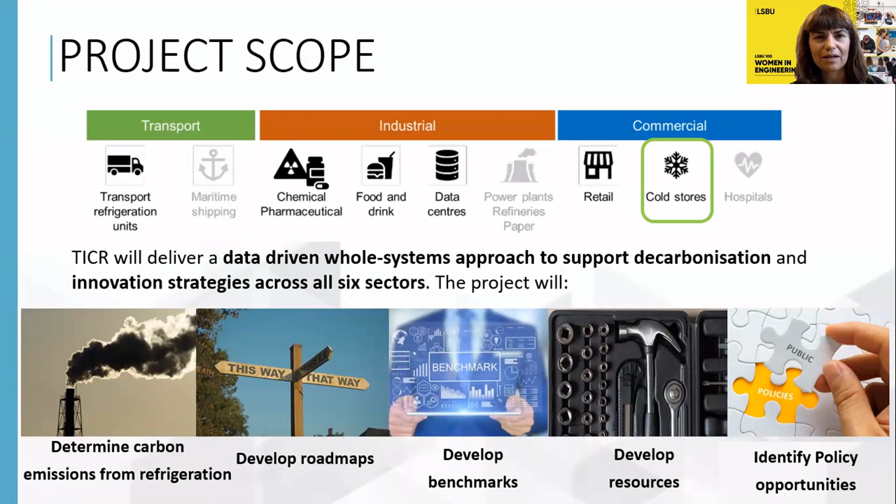And finally, this is a project funded by government, so we'll look at what policy interventions can really support the industry to get to net zero, and we'll be engaging with the industry throughout the project so that whatever we propose in terms of policy, it has the industry backing. So that's the goal, and we'll be engaging throughout the project. So we are about 1 year in, we still have 1 year to go, so there's going to be a lot of opportunities for you to input into the project. So if we move to the next slide. One more. Thank you. Excellent.

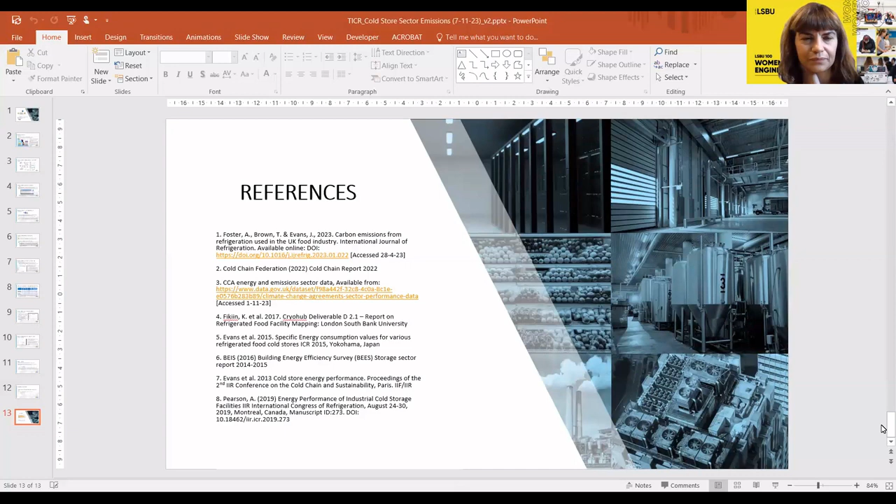Thank you. Thanks very much, Caterina. So we'll just swap over to Gareth Davis from London South Bank University, who's going to go through carbon emissions in the cold store sector. So Gareth, if you'd just like to put yourself in presentation mode and start at the beginning of the presentation, that would be great. Thank you. Yeah. Okay. Right. Can you see my screen? That's all perfect. Thank you very much.

Okay. Right. My name's Gareth Davis. I'm a senior research fellow at London South Bank University, and I've been looking at estimating the emissions profile for the cold store sector. So cold stores are mainly used for food and drink industries, but about 11% are used in other areas: pet food, funeral care, horticulture, pharmaceutical products. The Cold Chain Federation have suggested there are 1,131 cold stores in the UK, as shown on the map. They've also estimated that the chilled frozen food industry in the UK is worth around £19 billion with over 100,000 people employed. So it's a significant economic sector of the UK.

There are about 450 large cold stores operated by Cold Chain Federation members, but if there are 1,131 in the UK, that means there's about 680 operated outside of the Cold Chain Federation. The Cold Chain Federation cold stores represent about 40.8 million cubic meters of volume, and the cold stores are around 96,000 cubic meters each.

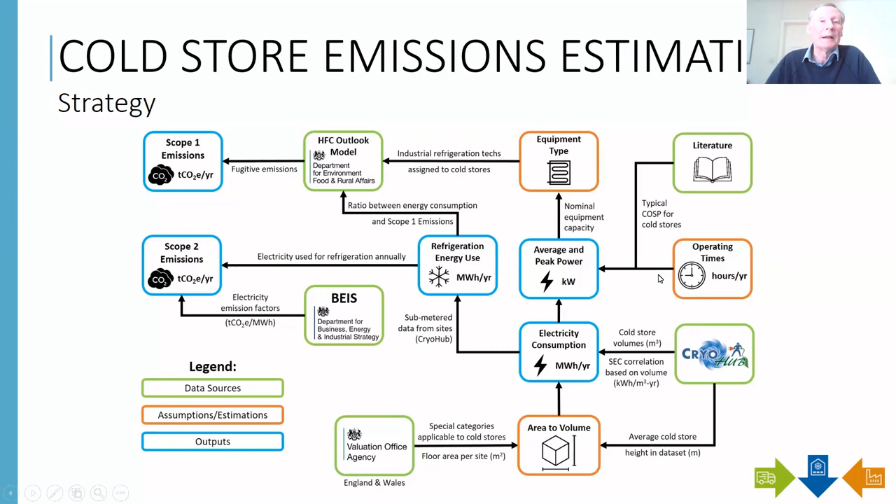And from the electricity consumption, we can derive the Scope 2 indirect emissions and the Scope 1 direct emissions, as shown here. The climate change agreement schemes are operated in many sectors of industry, including cold stores, and the cold store CCA scheme is managed by the Cold Chain Federation on behalf of the Environment Agency, and about 450 cold stores are covered by the agreement.

Now, the Environment Agency publish sector energy consumptions and emissions, and for the cold stores in 2020, they reported that the primary energy consumption was 3.63 terawatt hours per annum, which would equate to a final electrical energy consumption of 1.45 terawatt hours and Scope 2 emissions of 0.33 megatons. The total volume of the 450 facilities in the CCA is 40.8, as we saw earlier, and from that you can calculate the average specific energy consumption for the UK is currently 35.5 kilowatt hours per cubic meter per annum.

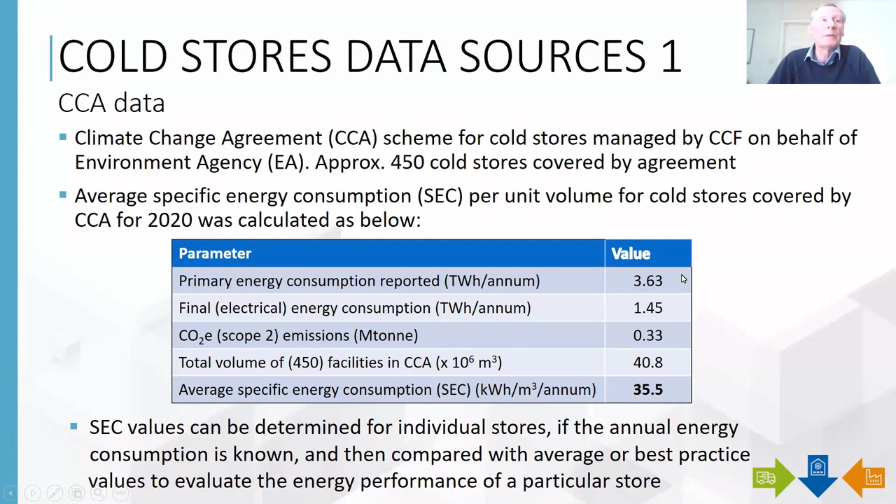SEC values can, of course, be calculated for individual stores, and you can then compare them with average or best practice values to evaluate your energy performance. The CryoHub project was EU funded and investigated cryogenic energy storage in refrigerated warehouses, and chilled and frozen volume data for 257 cold stores was collected. Then, using average SEC per unit volume values for chilled, frozen and mixed stores collected from survey data, the annual energy consumption for each store could be calculated.

The Valuation Office Agency data includes chilled and frozen store floor areas, but not height and volume data, although I think they may collect height and volume data, but it's not in the public domain at the moment. A total of 350 cold stores separate to the CryoHub cold stores were identified from the VOA dataset, and two approaches were used to estimate the annual energy consumption.

First, using SEC per unit area values, which were obtained from the BEES storage sector report. BEES stands for Building Energy Efficiency Survey. It was carried out by BEIS in 2016, and they could be used to calculate annual energy consumption. And then the other approach was to convert the areas to volumes using a mean height of 9.3 meters, which was obtained from the CryoHub data, and then using the SEC per unit volume values again, estimate the energy consumption.

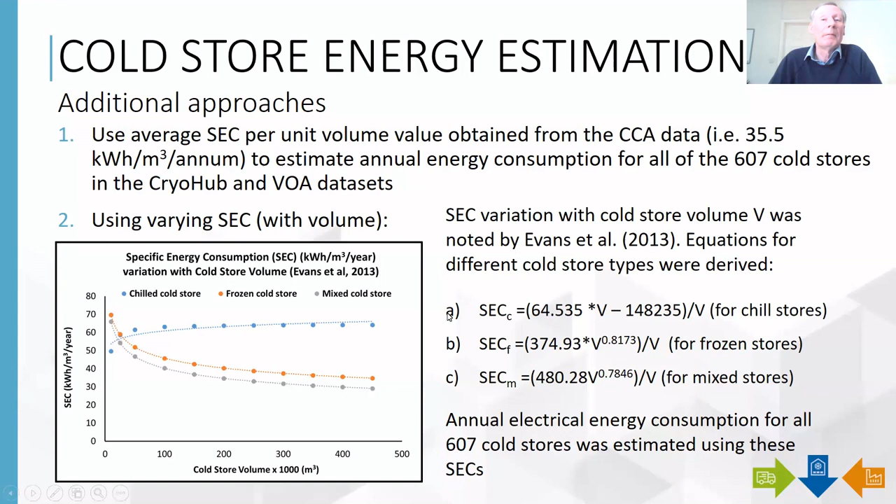So comparing the results for the different approaches, with the original average SEC from the 2015 paper, we have 50.2 for chilled and 66.2 for frozen and mixed cold stores, and that estimated the annual energy consumption as 3.43 terawatt hours. With the SEC per unit area values from the BEES report, we arrived at a slightly lower electricity consumption of 2.95 to 3.27 terawatt hours. Then using the CCA estimated average SEC of 35.5, the electricity consumption was 2, and the varying SEC with volume approach produced an electricity consumption of 2.25.

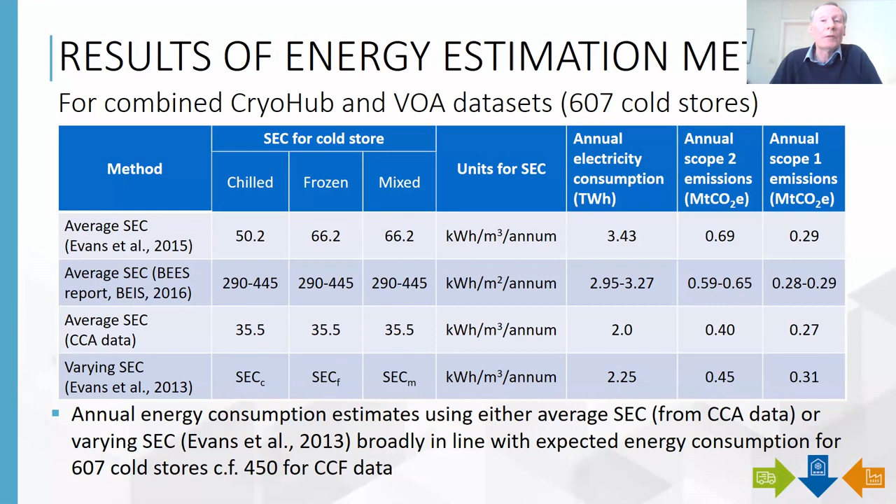With the electricity consumption, we could then estimate the scope 2 emissions, and then also the scope 1 emissions. And what we would note perhaps from this is that the values of 2 and 2.25 are broadly in line with what you would expect for 607 cold stores compared to the 450 from the Cold Chain Federation data, which we know the consumption for. So on a pro rata basis, that is about right.

Pearson in 2019 suggested a typical SEC for cold stores over the last 25 years was 30 kilowatt hours per cubic meter per annum, but with wide variation between stores. But more recent energy monitoring data suggested SECs in the UK are now more in the region of 8 to 20 kilowatt hours per cubic meter per annum, at least in the newest and largest stores. And a best practice curve was proposed as shown on the right here.

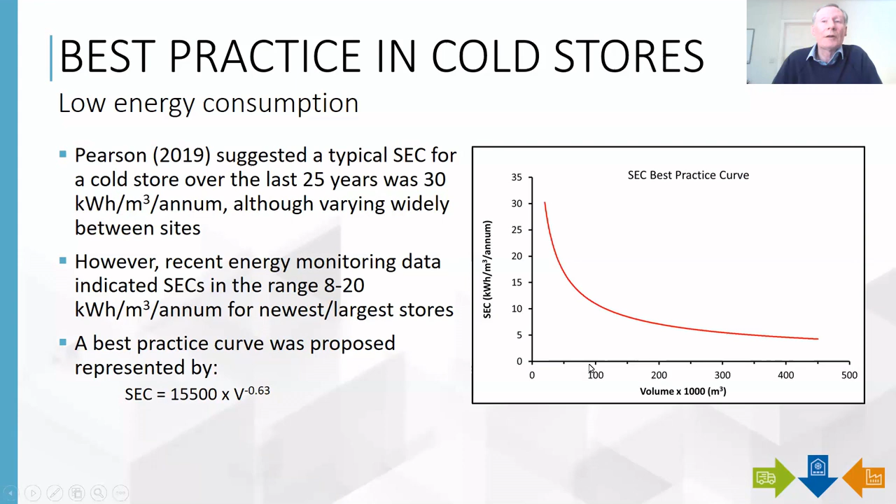What we aim to do in the project is to develop a benchmarking tool for cold stores, which would involve collecting data on annual energy consumption and volume for as many cold stores as possible in the UK. The data would be anonymized and treated confidentially, and with that data we could then define low energy use of best practice, and average and high energy user bands.

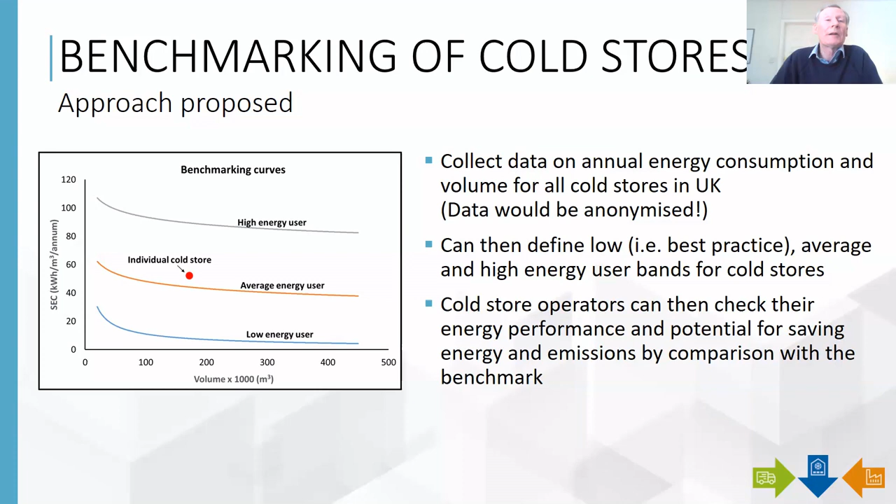So the data required for benchmarking is already being collected for CCA cold stores through the Cold Chain Federation scheme, but more data is needed, particularly for the cold stores which aren't in the CCA at the moment. And cold stores can already check their energy performance against best practice through the STAR refrigeration app.

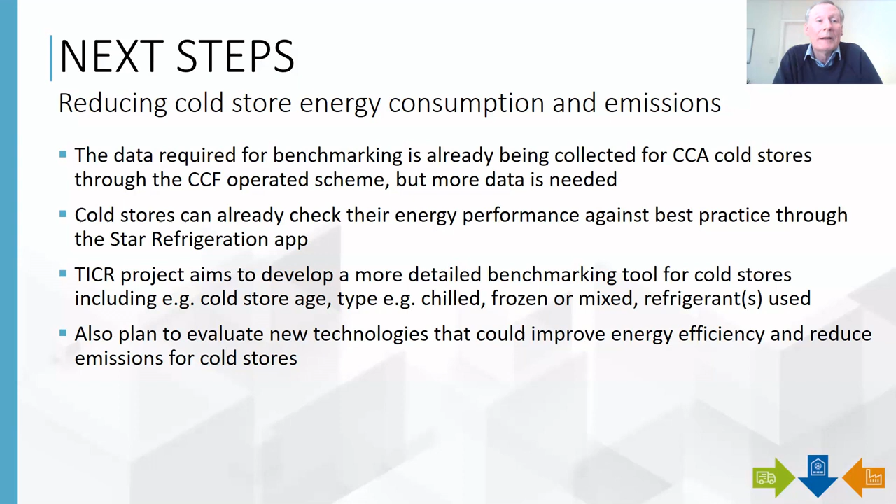But with this project, we aim to develop a more detailed benchmarking tool, including other factors such as the age of the cold store, whether it's chilled, frozen or mixed, what refrigerant is used, and refrigeration equipment. Also, we plan to evaluate new technologies that could help improve energy efficiency and reduce emissions.

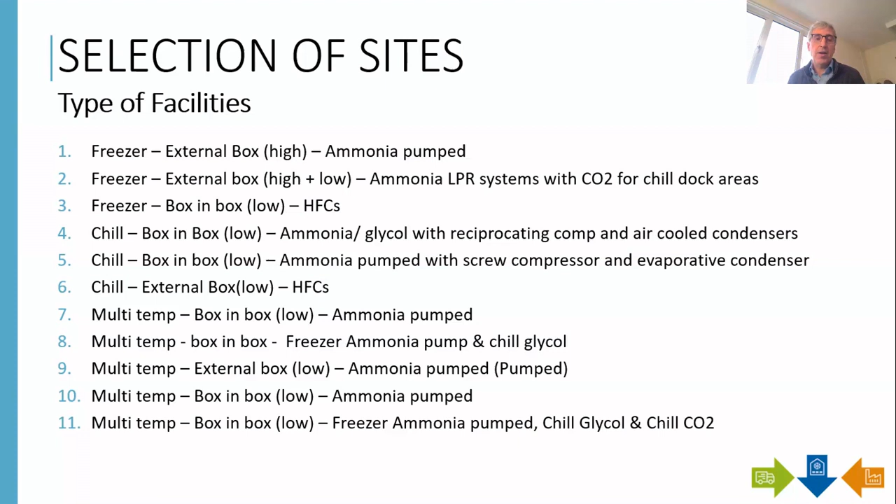Then there was a variety of different types of refrigeration systems, from direct pumped ammonia to an LPR system to HFCs. And for the chill store, there was glycol, and in some cases also CO2. So there is actually a variety of refrigerants around. So it wasn't just a few sites picked. I was really aiming for a big variety to get an understanding across the whole industry. Next slide, please.

So what about using technology? Well, what I'm actually finding is the refrigeration industry is very good at buying technology and the latest technologies. If they know what's out there, they're willing to buy it. So compressor inverters, condenser fan inverters, or gas cooler inverters, pumps, and buying the latest efficient compressors. The industry is very good at buying them.

But one of the challenges is when you come to buy evaporators and air cooler inverters, they've been buying them, but the industry is just running them as a fixed speed fan. So if you buy a bit of technology and you treat it like an AC fan, you're not actually going to get the benefit, because the reality is all you should have bought is the right AC fan. So if you're going to buy something like an EC fan, you need to actually use a speed control, because you're dealing with the cube law on fan speed.

And principally, the majority of places where EC fans are installed in evaporators and air coolers, they're not being used. And I hear there's challenges with those because they don't work. Well, you must control things with systems, not as individual coolers. You must control them as a system. But controls is another major issue.

How do we get our refrigeration plants to perform very well? Well, you need to control it as a system and not individual components. Now, the control systems, while they might have new and fancy names, they're still based on 20-year-old controlling principles and not using modern controlling technologies. It is down to software and control. The technology is already there. The technology has been there the last 40 years. It's not new, but it's actually implementation.

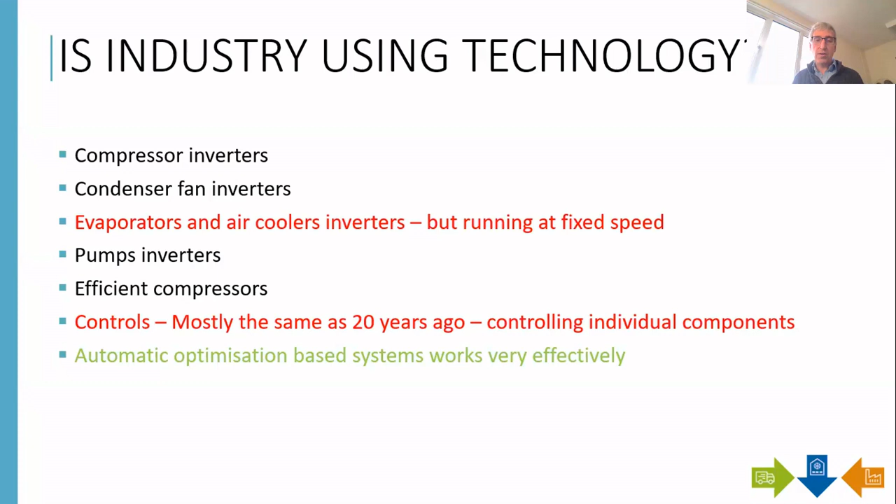And again, when it comes to optimization, there's now excellent optimization systems coming in, which work very effectively. There's systems where people can go online: oh, our condensing pressures are getting high compared to where they should be. And with those systems, when you look at the plant, it's running very, very efficiently. So more optimization type systems that tell you when it's out of optimization is the way to go. Next slide, please.

So I'm going to talk about experience. I've visited 11 sites. I'm going to talk about 2 sites. Yes, they might be to the one extreme, but it's showing what's happening in the industry. There was a site with multiple cold stores, and in 2 of the cold stores and 1 blast freezer, the plant was originally R22, converted, and then they got the plant replaced to R448. Now, they purchased high quality components. Because it's condensing units, they purchased a nice branded condensing unit, and the same thing with evaporators. But the challenge is when they started assembling the systems together, and that is down to the contractor.

Now, an example: when I went to site, it was 14-degree ambient, but the condensing temperature was 43 degrees C. And when you analyze the system, the reason it was running at 43 is because when they would reduce the condensing pressure, they would get flash gas going to the evaporator expansion valve, and they had problems with it. So they elevated the condensing pressures. And the reason for all of this is they never installed a liquid subcooler. It isn't an expensive component to put in, but they never installed it, saving a bit of money. And that was one of the big reasons.

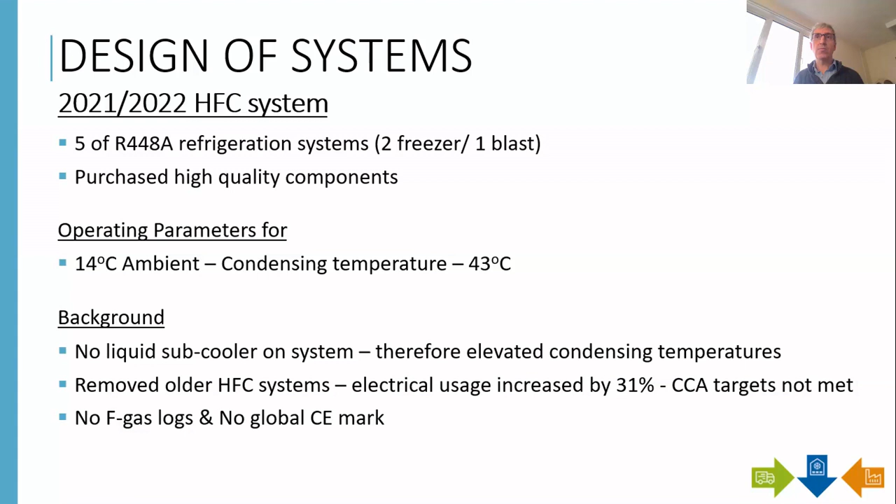And what was the outcome of this? Well, since the new refrigeration systems were put in in 2021, and you look at the energy data, and this site was very fortunate to have energy data, their energy consumption had gone up 31%. Now, you'd expect with new refrigeration equipment going in, it would be more efficient. But they never got their CCA target, and it was all down to the plant they put in not being efficient. But also, there was no F-gas log on site, and the new plant wasn't CE marked. So in other words, at this particular site we have unscrupulous contractors putting in equipment that is against standards, against regulations, and would never be running energy efficiently. Next slide, please, Lisa.

So then I went to the other extreme, a very large multiple temperature distribution center. To give you a background on the customer, he wants the most efficient system put in, willing to pay the money, even paying consultants to write specifications. There was an ammonia freezer and glycol in the chill areas, and he chose glycol in the chill areas because of safety. Again, good quality components were purchased. Everything had the buzzwords. You had inverters on pumps, EC fans, all the buzzwords with high technology. So the technology was there.

But when you look at the operating parameters, it was 12.5 degree ambient, condensing temperature 24. But this was an evaporative condenser. There's no reason on that day you couldn't be at least at 20 degrees C. But the challenge is when it went on a defrost, it went up to 28 degrees C on the cold store coolers, and that was for a few hours every day. And as anybody on this call is aware, every 1 degree higher condensing pressure is approximately 3% more energy.

But also when you looked at what was running, the majority of the evaporator and cooler fans were running all the time, even though there was no requirement. The load was low. An example of the coolers: there was only a requirement for 6 cooler fans, 6 coolers were actually running in refrigeration mode, but 18 cooler fan sets were running.

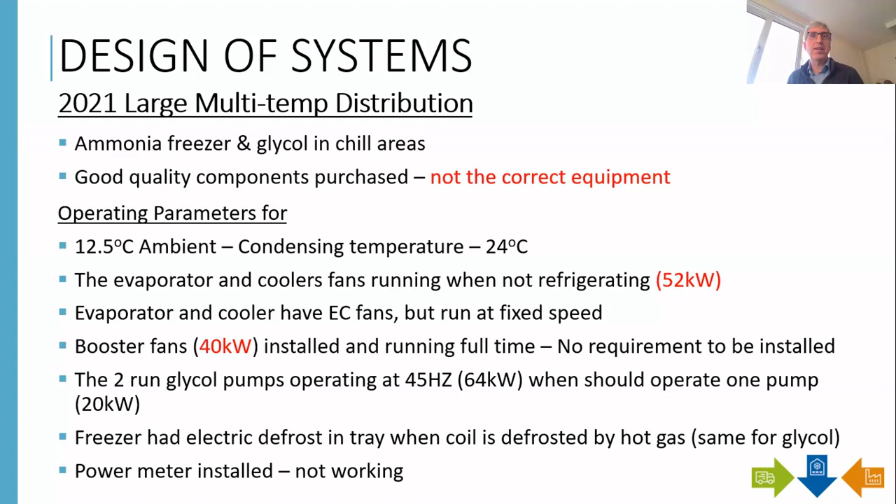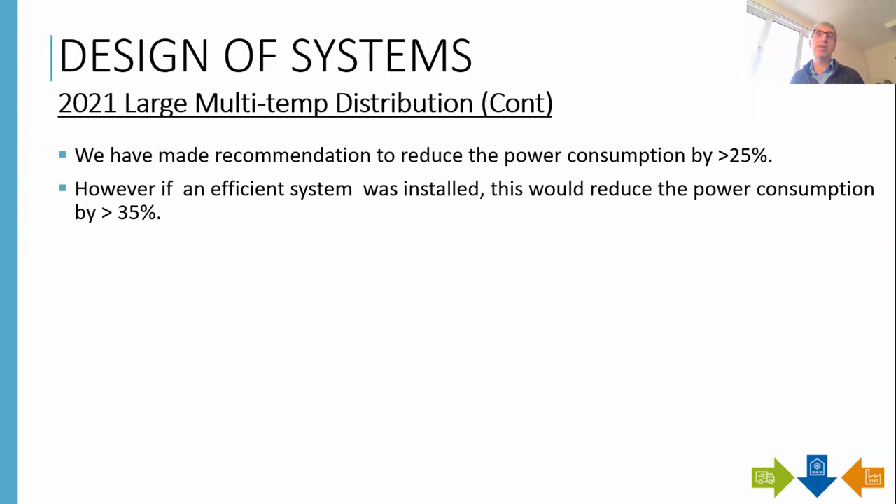Next slide, please. So what was the outcome? Well, some of it you can deal with control, and you can actually reduce the power consumption by implementing control items. And that is like the EC fans, turning off all these fans, getting down the condensing pressure. But there's at least another 10% of it you can never get back without actually changing piping and changing air coolers. So really what I'm highlighting here, there is a real challenge of someone willing to pay probably £5 million for a refrigeration plant, but yet something is put in inefficient. Next slide, please.

So kind of looking at this and the other sites, well, again, it's going to a site with no F-gas logs. Actually, both sites that I went to with HFC had no F-gas logs. Typically, I'm finding condensing temperatures are elevated, typically about 4 to 5 degrees. So without doing much, just by going around the majority of the sites, probably 8 out of the 11 sites, just by adjusting condensing pressures and tweaking stuff, you could probably make a 15% saving on compressor power alone.

Now, when you actually start asking questions about energy, well, very few of them are actually monitoring their energy to the refrigeration systems. Now, if you're not monitoring the energy to the refrigeration systems, how can you actually talk to a refrigeration contractor about energy and reducing it down and improving efficiency if you don't know what it's using? You don't know what to benchmark it by. So when Gareth talks about benchmark, he's talking about industry benchmark. But if you actually don't understand what's happening in your own site, how can you make improvement? And on the maintenance logs, no mention of energy efficiency.

So when you ask the question, what do you consider a good contractor? It's all about the system running reliably. So there is an issue here: the client doesn't know what is actually happening with his own plant. And on site, I'm even finding the people on the site don't even know what the electricity bill for the site is. So there's nobody driving energy efficiency on the sites.

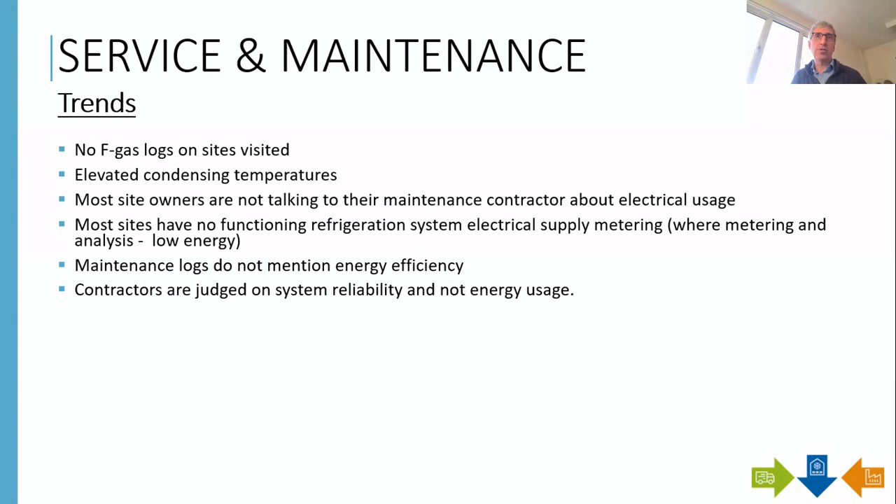Now, also, when I'm just talking about the inside of the box, cold stores inside the box are generally in very good condition. Chilled stores, mostly good, but the big challenge with chilled stores is air coming through doors on 2 of the 11 sites. Next slide, please.

So from going around, it leads to the question. I'm not concerned about technology because the refrigeration industry is very good at implementing it. What I'm concerned about is how we get from where we are to the future. And it's training within the industry.

So first of all, we need training because people need to understand energy efficiency and how to make a plant operate more effectively. And even at these new sites, you've technicians going around, but they should be seeing this and questioning, saying, why is this plant running inefficiently? Why are the condensing pressures high? Is regulation required?

Well, how do we actually go? We haven't changed what we've done in the last 15 years. We've all talked about net zero, but we haven't actually changed. We're not actually CE marking plants. We're not doing F-gas regulations. So how do we actually move forward?

And then when it comes to new plant, why are we putting in inefficient systems? It's down to design. It's how the controls go in. So do we need designers to be trained? Do you need qualifications? How do you make sure that you actually have a good plant? With the £5 million plant, the customer was willing to pay the money, and they didn't get what they were looking for, but they still didn't realize what they had.

And then, do you blame the end user? I can't get somebody who's good at moving pallets to be a refrigeration expert. So really it needs to come from within the refrigeration industry to drive to net zero, because the end users will never be experts. But they need people who they can trust. So really for me, it's how do we change the culture within the industry?